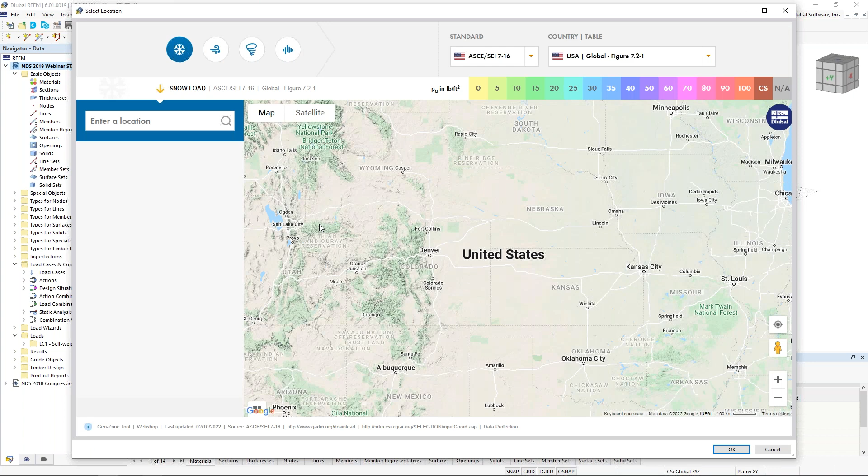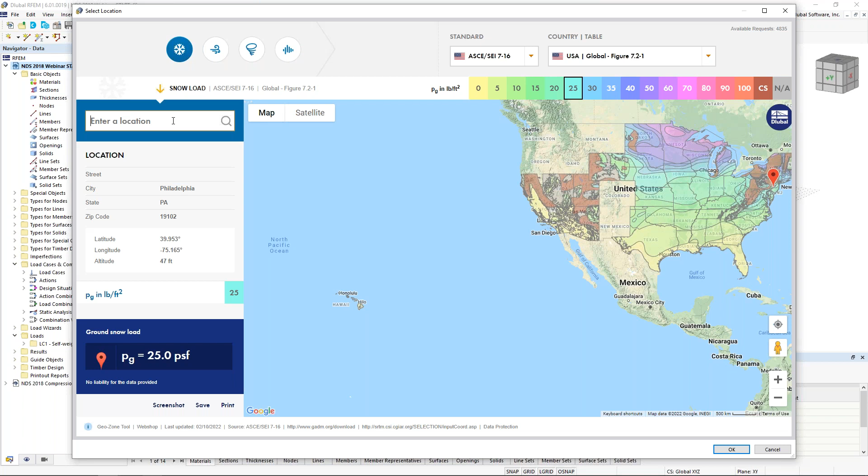Finally, under the model parameters, you can see that this links directly to our online Geo-Zone Tool. And this Geo-Zone Tool is available on our website where we have integrated the maps from the ASCE 7 for snow, wind, tornado, and seismic. This is linked with Google Maps technology, so we just need to type in our project location, for example, Philadelphia, and we can see the ground snow load is automatically populated here directly from the standard. When I click OK, all of this information is automatically going to be imported into the model that will be used for those load wizards a little bit later on.

So once we are done defining the base data, we will be brought into the main program, and we can see our drawing grid activated here. Well, we can modify those drawing grid settings by right-clicking at grid down at the bottom. My default spacing here is set at 1 foot. If we see anything other than this, for example, when you first start the model, you might see something like around 3 feet. You can always hit this default option here to go back to the 1 foot or adjust this to maybe 0.5 feet. We can also open up our units here and change this to inches if we're working on a much smaller scale.

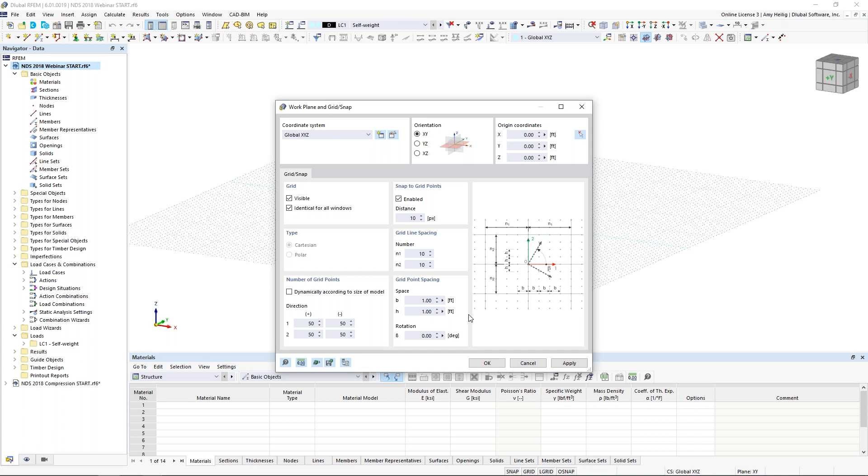So there are many different ways to model within the program. We could begin by drawing our first member and defining the cross sections and materials as we go. But an alternative option I'm going to take is to define all of my cross sections and materials at the beginning. So over in the navigator, I can right click on my sections and I can create a new section here.

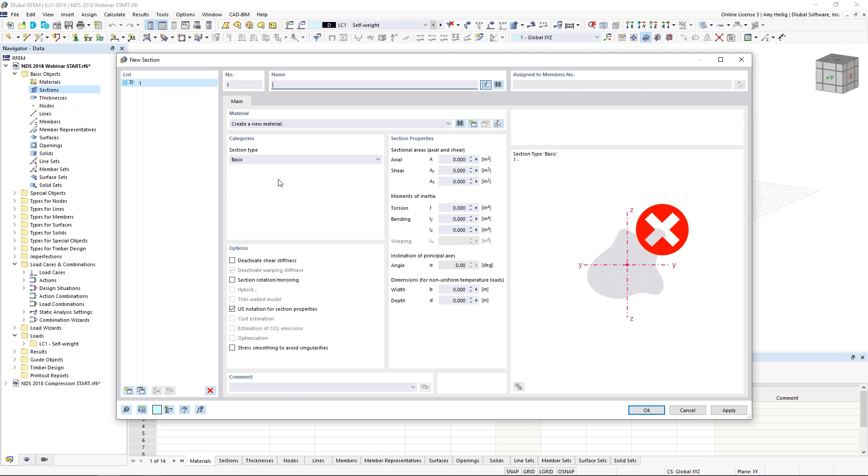I want to access my section library, and we have our standardized sections over on the left, which does include timber. So when we launch this, we can use our filters over on the left to filter the NDS 2018, and we see the various dimensional sections available to us, including glulam, for example, and we can see all of the available sizes.

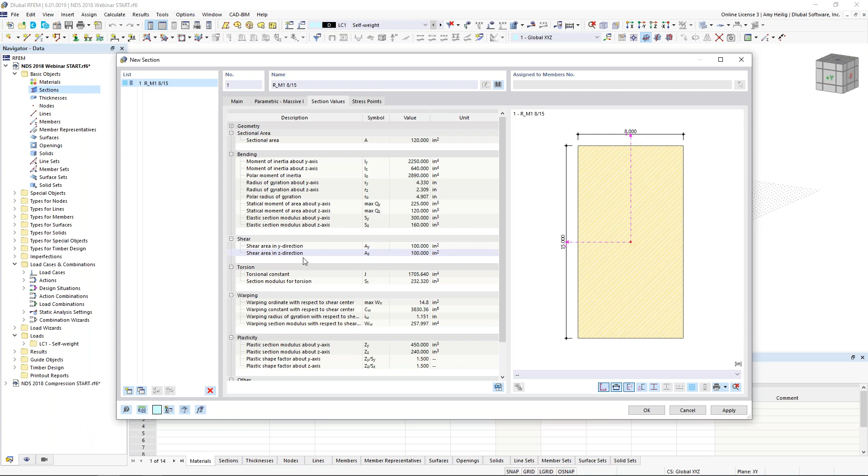Now, the alternative option is to go back into the library here and choose one of our parametric massive sections. So for example, we can just choose a rectangle. This allows me to input the dimensions directly, and we'll choose 8 inches in width and 15 inches in depth. The cross-section properties will be automatically calculated here. And back under that first tab is where we need to set our material for this cross-section.

So we'll visit our material database now, and we can use our filters over on the left here to filter to timber. We can filter to the NDS 2018, and sure enough, we have every single material available here from the NDS standard. Now we can take it a step further, and perhaps we want to filter to table 5A for our glulam materials. And I'm going to select 24F-1.7E. Over on the right-hand side, we can see the different options, and we'll choose Southern Pine.

I click OK, and now that material is available to me for all future sections that I will model in the program. I can simply make a copy of this existing cross-section, and rather than going into my library, I can simply type in the exact dimension here, 26. So we'll notice that this cross-section updates accordingly. Same material will be used. We want to create one more cross-section here.

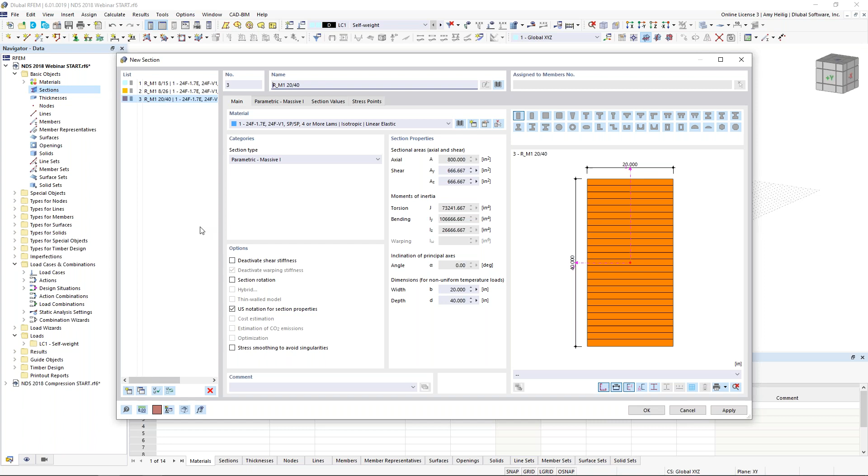This time, instead of a rectangle, we'll choose a parametric square section. Under the massive tab here, I will go ahead and adjust the dimensions to 6 inches. Under the main tab, I don't want to set glulam, but rather I'm going to go back into my material library and choose table 4D.

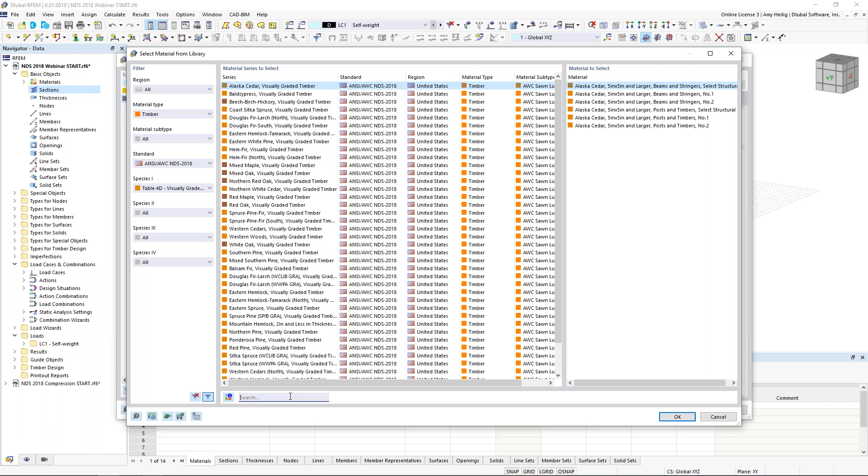Now we can see all of the available materials to us, which is still a little overwhelming, so we can take advantage of the search options down at the bottom. So for example, if I begin to type Douglas, notice that all of the materials with Douglas within the name are now filtered. So I can choose Douglas Fir-Larch (North), and then I can scroll over to select number 2. I click OK, so now we have that solid section given to us here.

Once I click OK, what I'll notice is that my materials and cross sections are now available within my navigator here. So I want to begin by drawing my first member. I will adjust my drawing grid into the vertical XZ plane, and I will go up to my tool to draw a new single member. The member type is going to be beam.

The design properties are activated here, and this is specific to the timber design add-on and relative to these additional tabs up at the top. So we'll leave this enabled, but I'm not going to get into the details right now specific for the design properties. We'll go to the section tab here, and the distribution type is going to be set to linear. So this allows me to define a tapered glulam section.

Now, new within RFEM 6 is that previously we only allowed you to define a tapered section that looked exactly like this, where the center line just runs right down the center. But we have added within RFEM 6 the ability to adjust the alignment. So now we can see that the taper only occurs at the bottom section of the member.

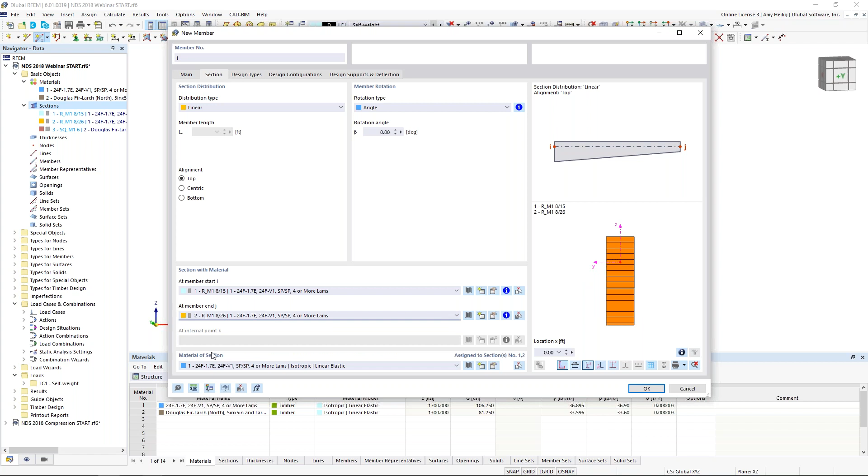So the member start will be that 8 by 15 section, but the member end will be the 8 by 26 that we've already defined. The material is automatically set here. So this is all that we need to do to define our first member. We click OK, and I can snap from the point 0, 0, 0 up to a point 15 feet in the vertical direction, and we have our first tapered member.

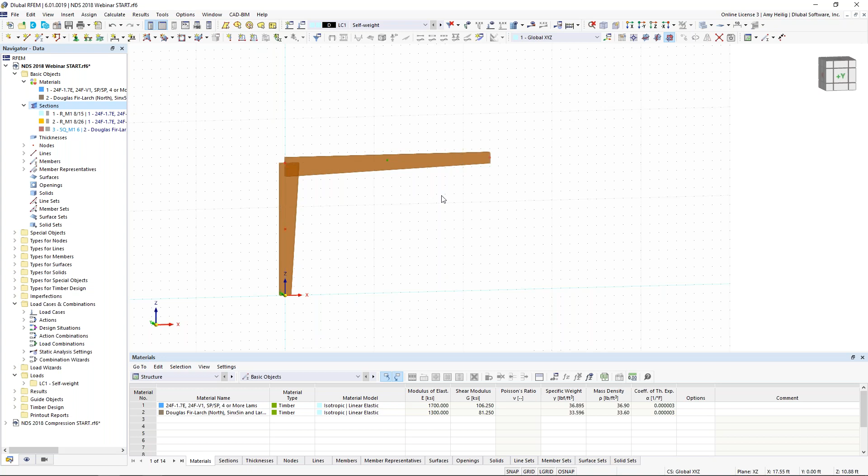Now, in a similar fashion, I can snap to a point here 23 feet in the X direction up to the top of the column. If I right click to exit out of that dialog box, I see here that I would like to add in some type of pitch for my roof, and I'd like this pitch to be 14 degrees. So rather than manually having to figure out the geometry, we can select this member, and under the edit options, I can go down to chamfer.

And I can input in an angle of -14 degrees. I would like to rotate about the global y-axis in the vertical z direction. And then I need to graphically select my base point here. I click OK, and so now we'll have that 14-degree incline.

I select both of these members, and I'm going to utilize my mirror tool. This is exactly like what we would see in something like AutoCAD, where I can create a copy. I would like to mirror about the ZY plane, and I'm going to choose my mirroring point right here at the apex. I click OK, and we should see our first frame generated.

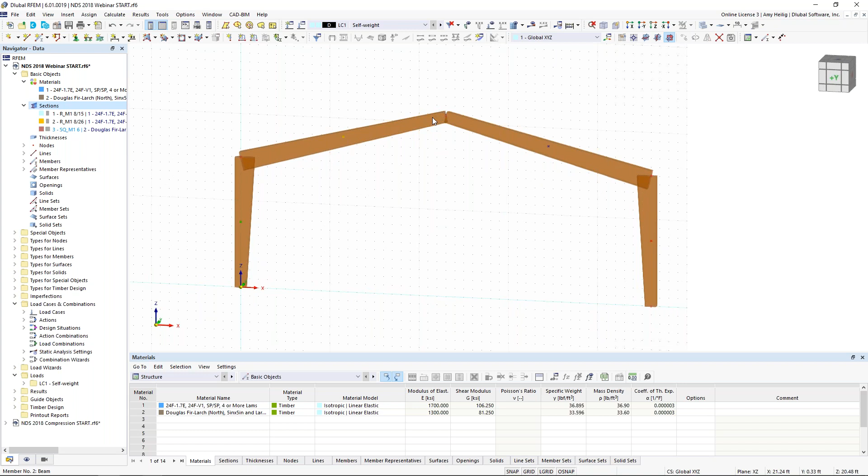Now, I want to add a member hinge at the top here only for my beam on the left. Well, I can do so by double clicking on the member. Now, by default, everything is considered fully fixed. So in order to add in that member hinge, I can activate the hinges here. And now we get a new tab. And at the member start, I can define my member hinge. And you can see that the program automatically suggests I probably want to release the moment about the local Y and local Z axes. That's correct.

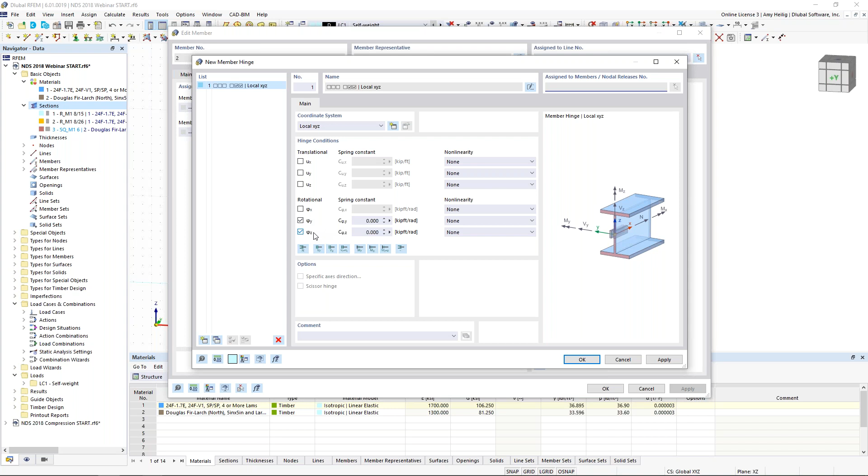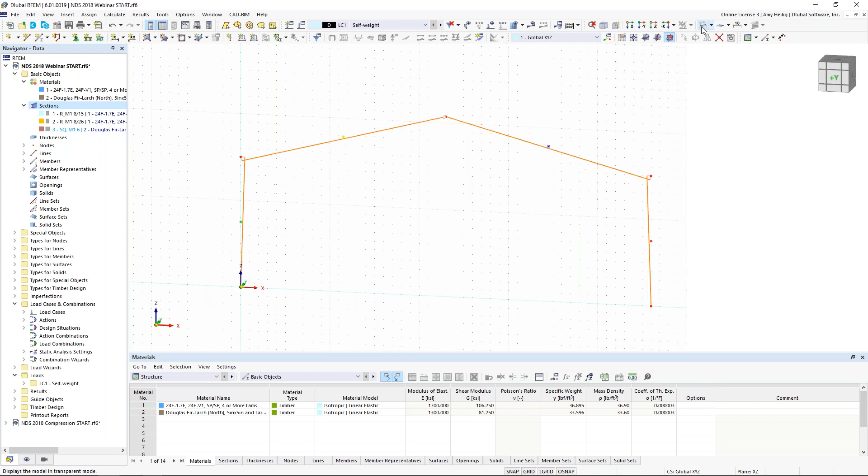I click OK. So now that member hinge definition is available to me for any future members within this model. I don't need to keep redefining. I can simply select it from this drop-down box. I can click OK. And now we should see that member hinge applied to that beam on the left. So I'll turn this into wireframe view, and I'm going to turn off my member representatives in order to make this a little bit more clear for you.

I'm going to hold down my control key to select both of these top members. And I'm going to right click, and under members, I am going to divide the member by a set number of intermediate nodes. So I want to add 2 nodes along the member length here, but it's really important that I also check this option down at the bottom to create the on member nodes without actually dividing the member. We want to keep these as one continuous segment and just rather have these nodes added along the length.

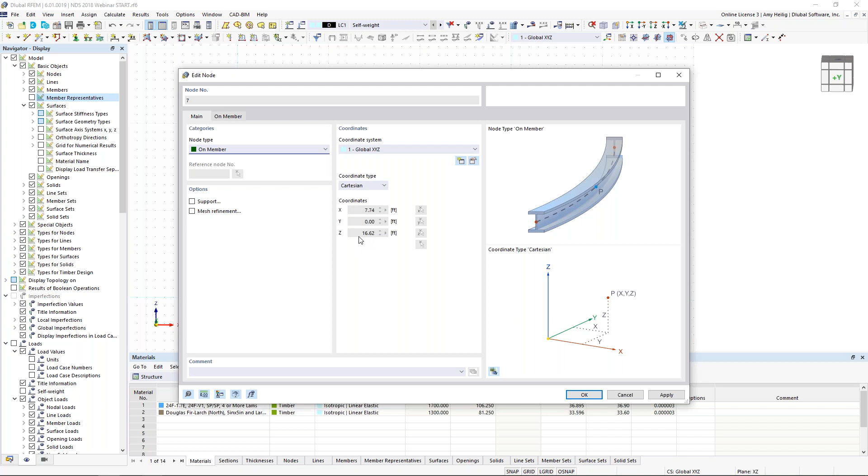So when I click OK, you'll notice that these nodes are added. They're a different color than my standard nodes. If I double click on it, the reason why is because it has this special setting here. The node type is set to on member rather than standard. So now any other member that frames into this original member, maybe we add in some nodes at these, or add in some loads at these specific nodal points, will all be detected along the member length.

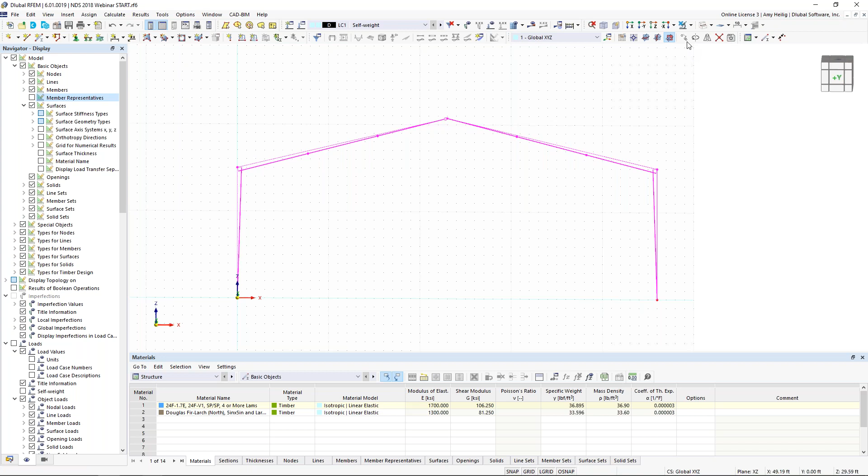I'm going to take my selection box and drag from right to left. And notice I am not going to select the nodes at the bottom of the structure, and there is a reason for this. We will select all of these objects except for those nodes and utilize our Move Copy tool. Move Copy tool allows me to create a copy, and I'll create 4 copies in the Y direction of 16 feet. But under my second tab, I have this option to activate these step links.

So when I activate this, I get a new tab, and the program allows me to create new members between my copied nodes. So I can create a new template, and this should look like a familiar dialog box. It's as though we're drawing a new member. The member type is going to be set to truss.

So truss is a little different, and you'll notice that the hinges is now grayed out. That's because internally we're going to assume that we have a moment release at the member start and the member end. So rather than having to manually define that, we can select truss, and that's automatically applied.

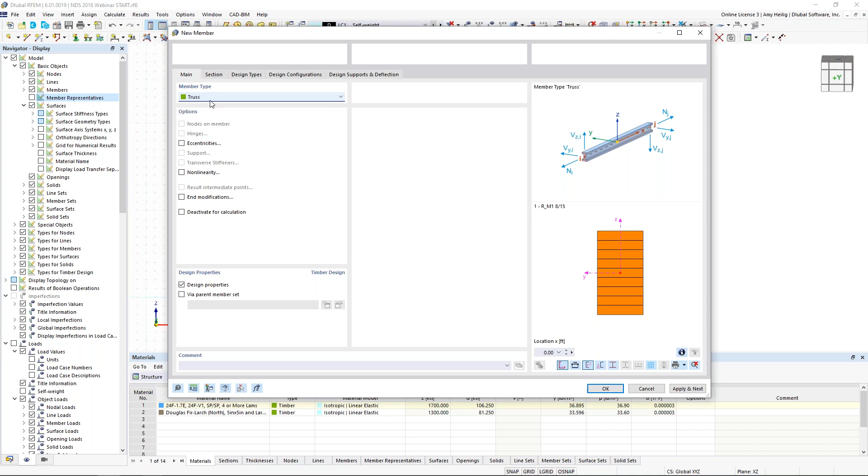Now for my cross section, I want to use my drop-down box here to select that 6x6 solid Douglas fir-larch section. I click OK. Remember, I'm still within the Move Copy dialog box. I click OK. And again, the advantage is that the program has automatically generated those members between those copied nodes.

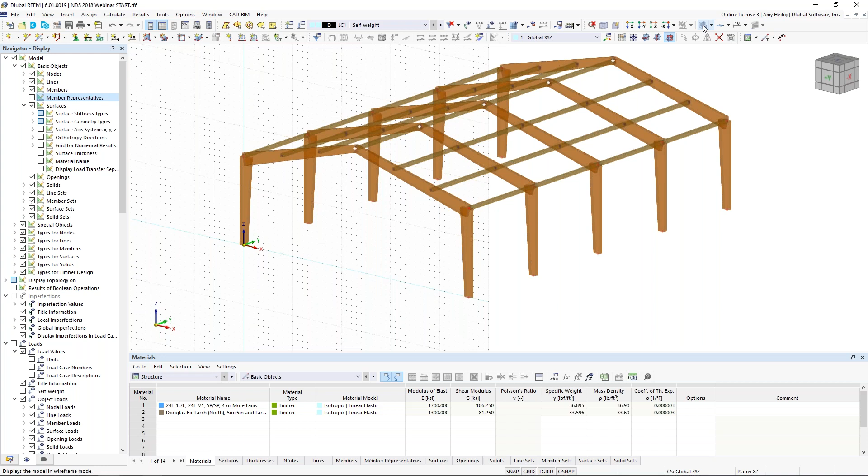Okay, so what we would like to do now is to add some columns at the front and rear of our structure. What I'll do is turn this back to wireframe view, and I'm going to adjust my drawing grid origin with this button up here in my toolbar. And I want to snap that directly to this point along my member length. So we can see when we rotate this around, the drawing grid's still at the front of the structure, but I've just modified the location.

We're going to draw a new member. The member type is beam. I do want to activate the hinges here. At the section tab, I will leave this as the 8x15 section, but not tapered, just one continuous section throughout the length. For the hinges, I would like the member hinge to be applied to the member end. Remember, I've already defined that member hinge. I can select it from my drop-down box.

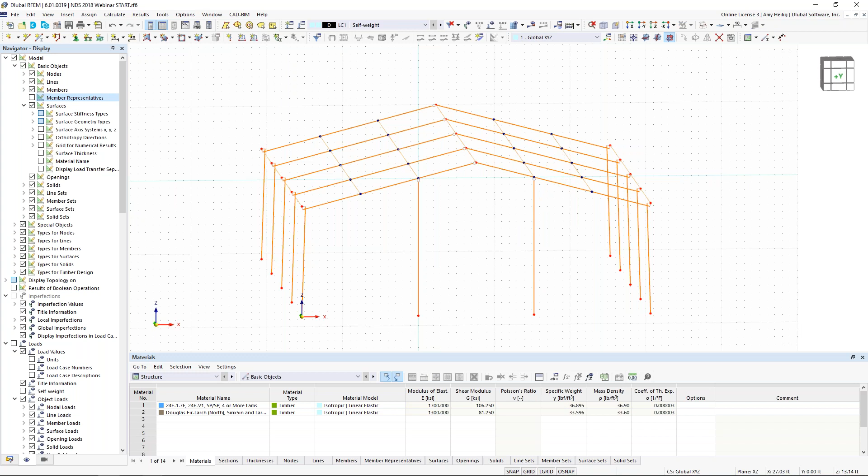I click OK, and I'm just going to snap here from a point at the bottom of my structure up to the top, the intersecting node. Now, this node needs to be slightly adjusted at the bottom. Rather than sitting at negative 0.33, I want it to sit at 0 elevation. I just adjust that, I hit enter, and now that column is exactly where it should be. I can highlight this element, hold down my control key, and utilize the drag and drop feature to make a copy here on the right side of the structure.

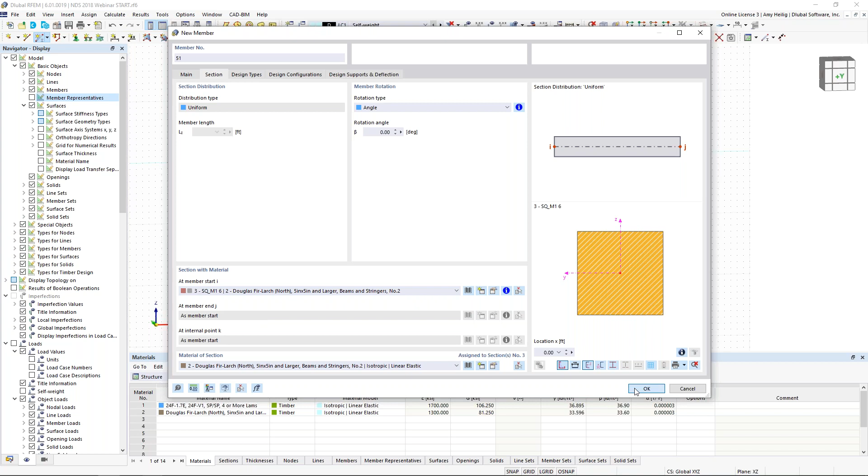I would like to add in some additional lateral bracing here in the global X direction. So we go to draw a new member. Once again, the member type will be set to truss. The section is going to be that 6x6 solid section here. Remember, I don't need to apply any hinges because internally the truss option is taking care of that. And I'm just going to snap from the bottom of my column elements up here to the top. I can rotate this around. Notice the program automatically snaps to these nodal points.

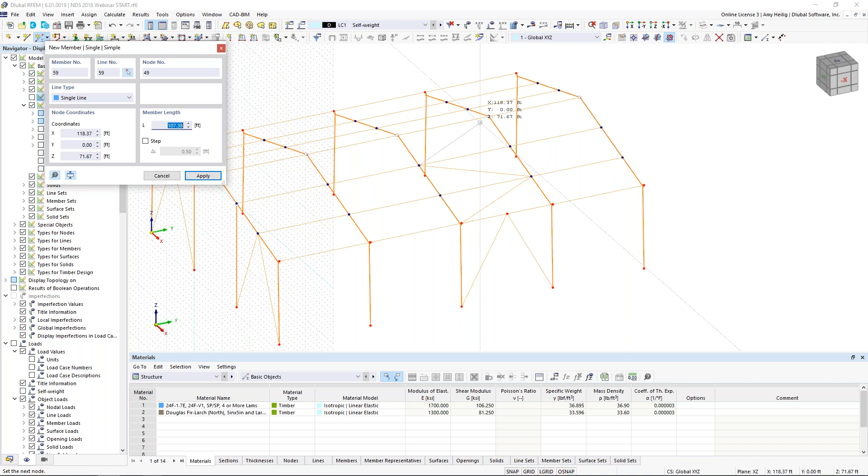While I'm still within this dialog box, I want to add in additional lateral bracing here in the global Y direction. So I will snap from the bottom of the column. Notice the program detects the midpoint here of that truss segment. And I'll do so up here on the roof by just selecting my start and end node points. And we'll do it one more time here. I right-click to exit out of this dialog box, zoom in just to make sure everything's connected, everything looks fine.

Now I'm going to hold down my control key to select these additional brace elements that I just created. We'll utilize our mirror tool once again to create a copy about the YZ plane, and I'm going to select my mirroring point at the top here of my structure. I click OK, and now we have the bracing on the other side.

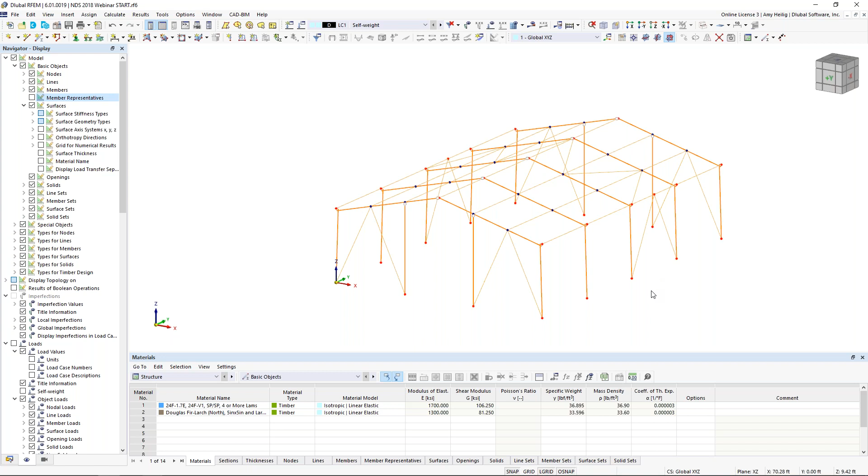I would like to take these elements at the front of the structure. I will use my selection box to highlight them all. I hold down my control key, I drag and drop to make a copy at the rear of the structure. So now those column elements and braces are shown at the rear of the structure with that simple tool. Okay, the member modeling is now complete.

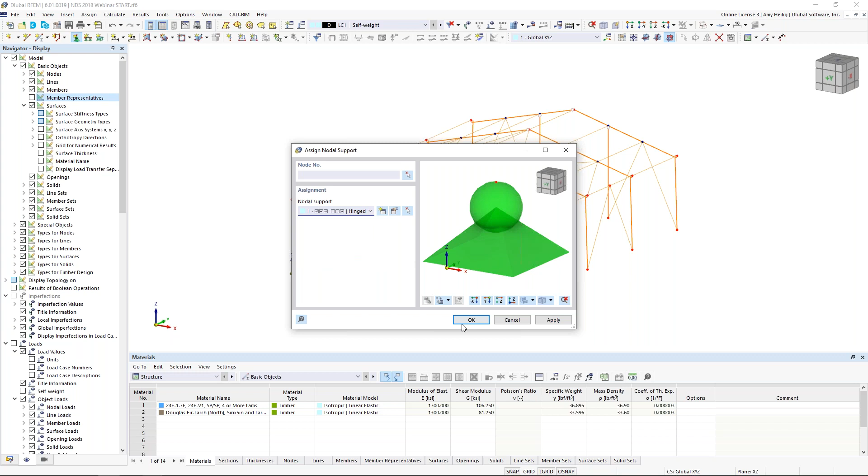What I would like to do is to support the structure with a new nodal support, and we can find that up here in our toolbar, assign new nodal support. Now we have some default options here within the dropdown, including a typical hinged, we have fixed, or we have a few roller options. Of course, you can always create your own nodal support option with the 6 degrees of freedom. Non-linearities are available in there as well, but for today, we're just going to choose the default hinged. I click OK, and this will allow me to highlight over all the nodes at the bottom of my structure.

If I right-click to exit that dialog box and right-click on any one of these nodal supports, I can use my slider option to increase or decrease the size. That's also new within RFEM 6.

So our member modeling is complete. We've added the supports. I'd like to move on to loading now, but there's one thing related to modeling I want to take care of that affects our loading.

This structure will obviously have some type of roof membrane, but I don't want to actually draw in the roof surface with a material and thickness. Instead, I'll take advantage of a new feature within the program for load transfer only. I'm going to draw a new surface, and it's not going to affect the stiffness or add any rigidity to the structure. We're not applying a material, we're purely using it for load transfer to our members.

Within our toolbar, we can draw a new surface, and I'll choose the option polygon. Rather than the stiffness type set to standard, where I would define a material and thickness, we'll use the dropdown to select this new option, load transfer. Everything is grayed out here since we're not adding stiffness, but instead we go to this second tab and tell the program in which direction we want to transfer the load.

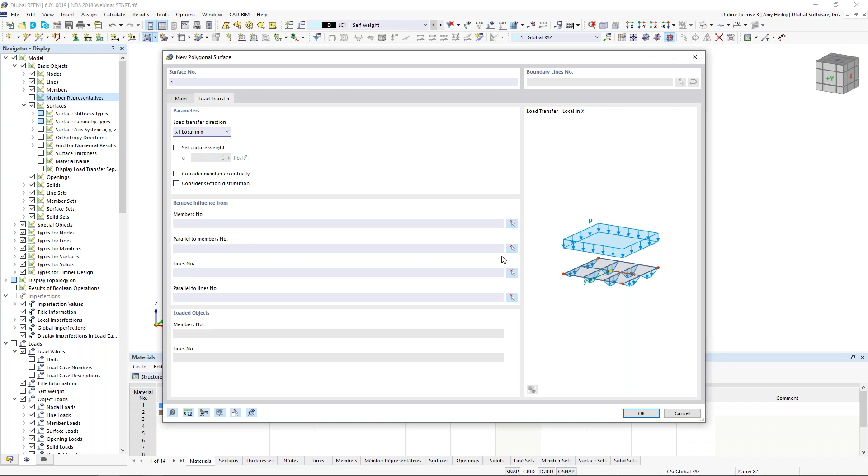When I click OK, this allows me to snap to my different points to draw in this load transfer surface on the left side, and we can see that dotted line shown in wireframe view. We'll do so on the right-hand side, and close this loop by selecting our original point, and here are those two surfaces generated.

I can right-click to show the local axis system of those surfaces, and make sure the local x-axis direction for the load distribution is in the correct orientation. I'll turn back off the local axes. We can even turn this into rendered view if we'd like to see those surfaces in a bit more detail.

Now that these surfaces are drawn, our modeling is complete and we can truly move on to the loading. In order to apply the loading to the structure, we need to set up our load cases. I will go up to my toolbar to select Edit Active Load Case.

The program by default creates my first load case, called self-weight. I can go ahead and rename this to dead load. Notice the self-weight is active here. The action category is based on the ASCE 7, and we've selected dead load from this dropdown.

I'm going to create a second load case, called snow load with the action category of snow. Self-weight is unchecked here, since we don't want to account for it twice.

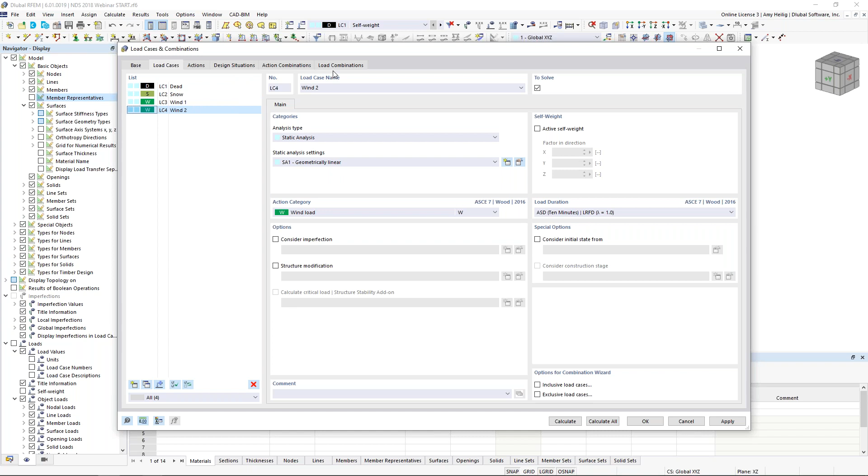I'm going to create a third load case, which will be wind 1 with the action category of wind load. And I can even make a copy of this existing wind load case and simply rename it to wind load 2. Now I'll get back into this dialog box to explain further about design situations and load combinations, but for now I just wanted to set up these load cases.

Now that those are set up, I can actually apply the loads to the structure in the relevant load case. We'll begin with dead load. The entire advantage of these new surface load transfer options is that I can now apply a surface load to this structure, which is much more efficient than applying individual member loads to each one of my frames, for example. So I'll go up here to draw a new surface load.

The load magnitude is going to be set at negative 0.01 kips per square foot. I can graphically select surface number 1 and surface number 2. I click OK, and here are my loads shown graphically on the structure.

Now, under the display settings in my navigator, we'll see at the very top our surfaces tree. When I expand the surfaces, we have this setting to display the load transfer separately.

So I can activate this, and now we can see the loads applied to each member based on the tributary area. So this is a bit of a time saver, utilizing these surface loads.

Now for our snow load, we want to take advantage of our load wizard. If you remember, we set that up within the base data at the beginning of the presentation. Going back to my navigator, under the data tab, I'll scroll down and see my load wizards tree, and we have available the snow loads. I'll double click on this, and this will allow me to automatically generate the snow loads according to the ASCE 7.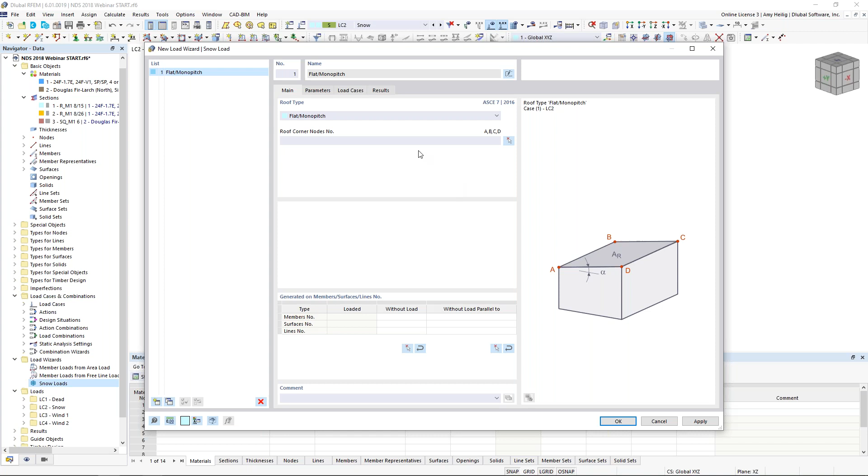So we want to choose the roof type for a dual pitch type of structure. I just want to let you know that this load generator is only applicable for rectangular type structures. If you have anything outside of this geometry, you won't be able to use this automatic load wizard, so just keep that in mind.

For today, we do fit into this geometry, so we want to graphically select the nodes that make up the roof. We will select the 6 exterior nodes, clicking one by one. Once I finish that, the program automatically detects what the roof geometry is.

Under the parameters tab, the program has already input my ground snow load. We have connected that to the GeoZone tool directly from our website, which inputs the 25 PSF ground snow load directly from the ASCE 7 maps. Now, of course, you can manually enter this information as well.

Now, the snow load parameters, maybe you'd want to adjust these, such as the terrain category, roof exposure, risk category. We can use our drop-down box for any one of these options.

Under the load cases, we have the ability to create both the balanced and unbalanced load cases. I'm not going to create the unbalanced for today, so I'll just uncheck them, but we will create the simple load case for balance. The program recognizes, okay, we probably want to use load case 2 here that was already set to the snow load designation, so it's populated that.

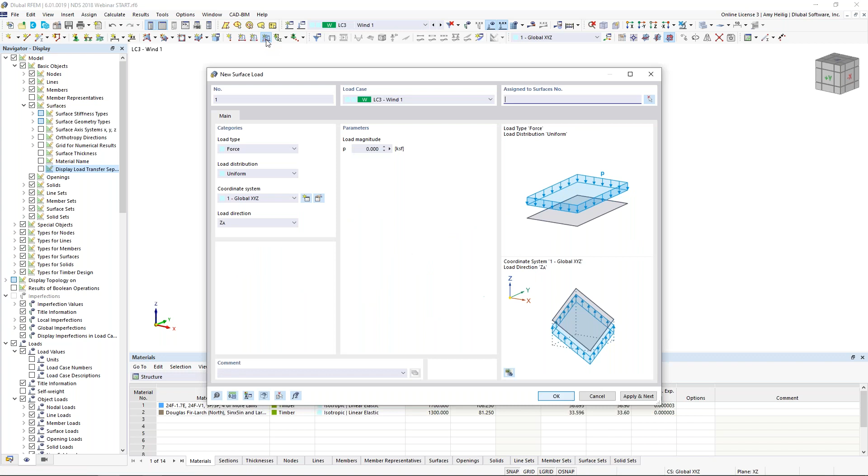For load case 3, we will begin with a new surface load. The difference here is that I want to change this based on the local X, Y, and Z coordinates of the surface itself, so we'll leave this according to the local Z direction. I want to modify the magnitude to 0.025 kips per square foot. I select graphically surface number 1, click OK, and then hit apply and next. This allows me to remain within this dialog box, but we can see the upward wind load applied in the background here to surface number 1.

Now I can simply adjust the magnitude to 0.015 kips per square foot. I can graphically select surface number 2. I hit apply and next, and now we see that additional surface load applied on the second surface.

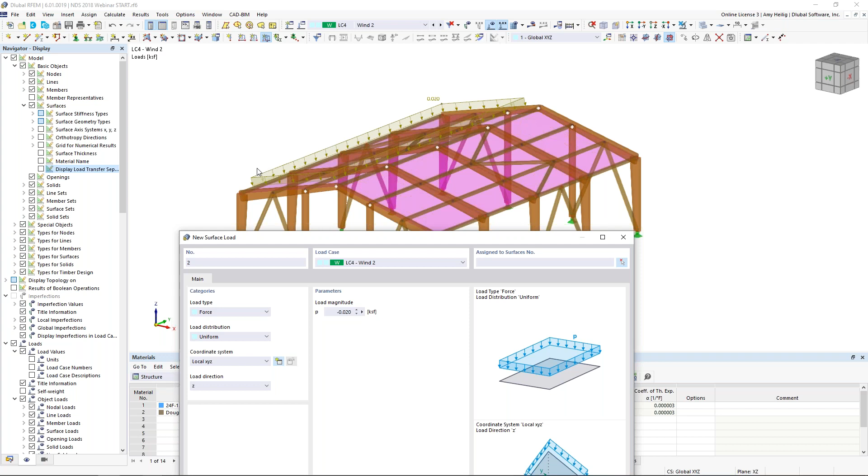Now I can simply switch to load case number 4, while still within this dialog box, and adjust my magnitude to negative 0.02 kips per square foot. I can type in surface number 1 - I don't necessarily have to graphically select it. I hit apply and next, and we see that downward pressure applied to surface number 1 under load case 4.

I'm going to adjust my magnitude for the last time here to negative 0.01 kips per square foot.

I apply to surface number 2, and I click OK. Now all of our loads have been applied to the structure. Let's go back into the load cases and combinations dialog box here.

Back under the base tab, remember we have activated the load combinations to automatically be generated according to ASCE 7. The program requires us to choose the wood option because we've activated the timber design add-on, and the entire reason for this is the feature of creep. Let's jump back to the PowerPoint to discuss this in a bit more detail.

This entire topic is new within RFEM 6, and we want to refer to NDS 2018 section 3.5.2 for long-term loading. This section talks about the time-dependent deformation, or creep factor K sub CR. This factor should be applied to the long-term deflection, but not the short-term, in order to be considered for the total deflection according to equation 3.5-1, which we can see written here.

So when we automatically generate these load combinations according to ASCE 7, wood in particular, we are going to create a third design situation. Design situations will make more sense in a minute, but I want it clear that we are actually referencing IBC 2018, section 1604.3, in order to generate

This is a new feature; previously we were not able to consider this creep factor. You'll notice within the drop-down box, if we do not want to consider creep at all, we can just set this to 1.0. Otherwise we would choose the 1.5 or 2 factors here, which come directly from the NDS standard.

I always like to activate this option here, combination names according to the action category. And we will jump to the design situations.

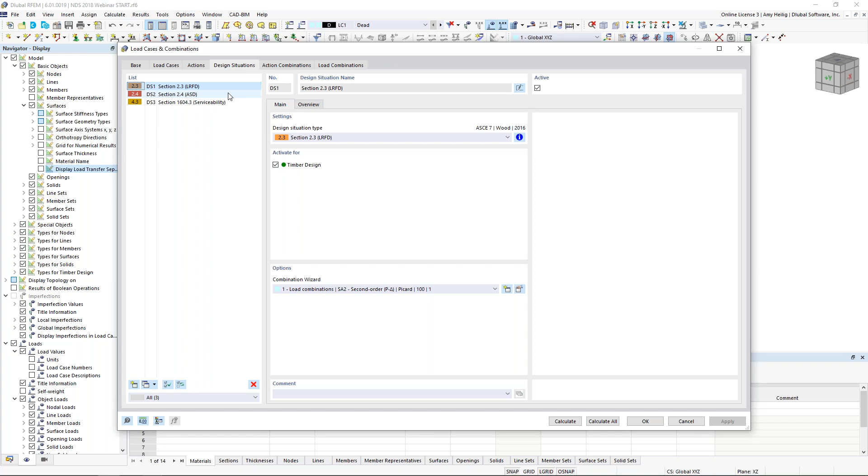So we have 3 design situations generated: 2 directly from ASCE 7, LRFD which is our factored load combinations, and ASD which is our unfactored load combinations. Again, this is new within ASCE 7 wood, we create this 3rd design situation here

for serviceability. If we click this info button, we can see directly the load cases that will be considered for the generation of the load combinations. And here is that creep factor times our dead load.

All of these are active for our timber design add-on. Now for today, I am going to be doing my design according to LRFD, not ASD. Therefore I don't need the ASD load combination, so I can simply deactivate that here.

It will just decrease the number of load combinations, which we can see here under our last tab. Here are my factored LRFD load combinations for my first design situation, and my 3rd design situation are my IBC load combinations. Here we see the 1.5, and we can toggle to the assignment, the 1.5 creep factor multiplied by our dead load.

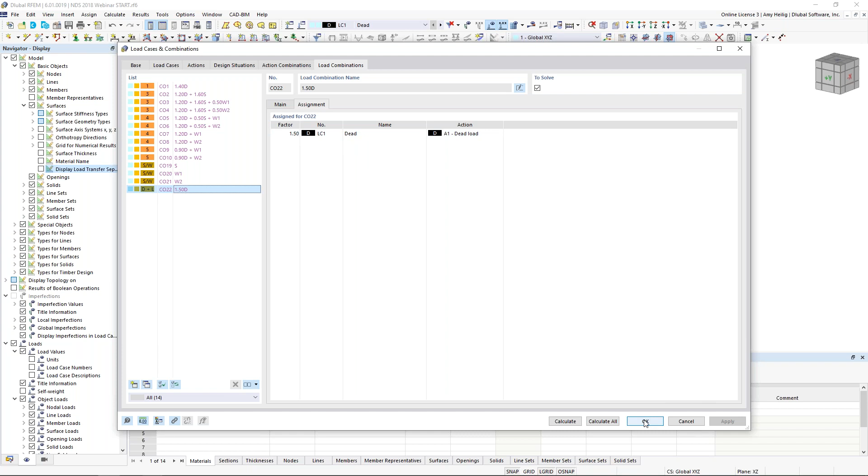Now that these load combinations are set up, within our drop-down box we can see all of the available load combinations we were just looking at. We can view all of the loads applied to the structure, including the relevant load factors according to ASCE 7 and the IBC. So technically we are ready to run the analysis portion.

The huge advantage of running RFEM 6 is that these add-ons have all been integrated here within the main program, so we want to do the analysis and design workflow together. What I'm going to do is move into the design properties for all of these members.

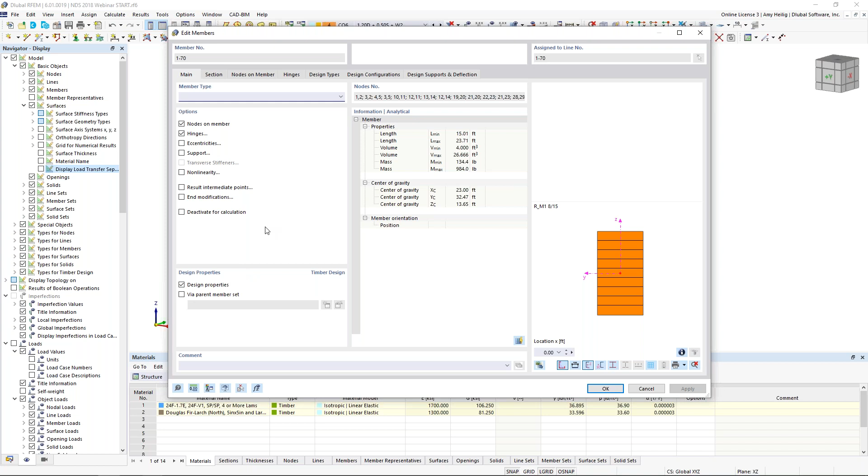If I highlight all of my members and take a look at the edit member detail settings within my dialog box, you can see I have members 1 through 70 selected. We have our design properties turned on here, which activates these various settings for design types, design configurations, and so on.

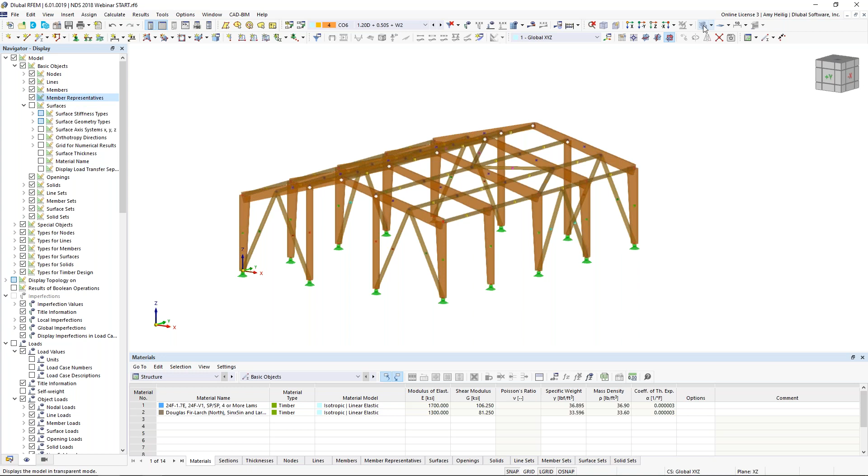Let me turn on the member representatives and wireframe view. So you'll notice we have a lot of color coding going on here. Again, we have activated that within the base data, so the program has grouped together similar members with cross sections, materials, and so on. Now, I want to take these 4 members at the end, and I'm holding down my control key to select them.

I am going to double click to edit, and I'm going to add a comment down here, such as end frame. Remember, I also activated the option at the beginning of the presentation so that member representatives will detect different comments. So now these 4 members are in a different member representative group than the interior members. Back under my navigator display, I can also see the color coding, and we can scroll through the different member design or member representative options here.

Okay, so what is the advantage of these? Well, when I double click any one of these colored dots, so for example, we'll start off with member representative number 4, it will bring me into the member representative dialog box, and you'll notice we have these exact same tabs that we saw for each individual member. So what I can do now is to input the design information for a group of members that I know are all going to have the same unbraced lengths, for example, the same service conditions, whatever it may be. That way I can go into the member representatives, make a change, and it will affect all of those group members rather than individually applying to each member.

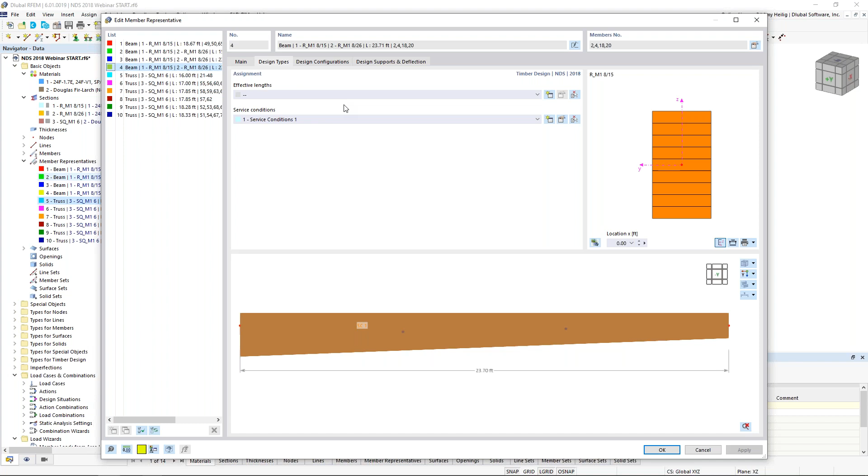So let us begin here with these initial tapered members. Remember, this includes the 4 exterior girders here. Now we want to start off with the effective length. So I'll create a new effective length here. And this is my input information for stability design. So we're talking about flexural buckling about the strong axis, the weak axis, and lateral torsional buckling. Now we want to set the information here on the second tab.

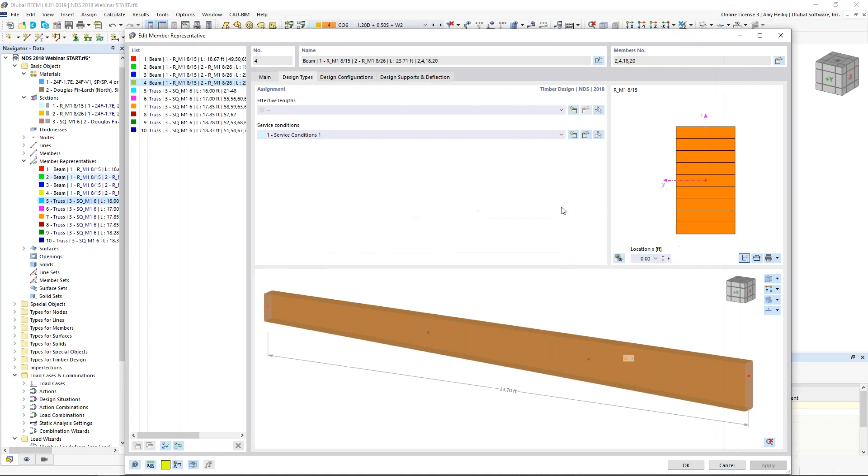But before I do, when I initially create a new effective length, notice over on the right-hand side, my members aren't populated. Well, if I initially create this definition, I click OK, and I go back in to edit the same effective lengths, notice now the program says, okay, we're going to assign this to members 2, 4, 18, and 20. Why do I want to do that? Because now my picture in the lower right-hand corner will populate here. So I can see exactly which members I'm looking at in order to apply my intermediate restraints. So let me turn this to wireframe view.

Now, this all has to do with K-factors, with unbraced lengths, incredibly important for design, and we have two options here. Number one is we could work with the table down here at the bottom. Perhaps we want to toggle this to absolute values, and I could just directly input K times L for my strong axis buckling, weak axis buckling, lateral torsional buckling. Now, alternatively, I can take advantage of inputting these intermediate supports graphically so that the program can calculate the K times L or the effective lengths automatically for me.

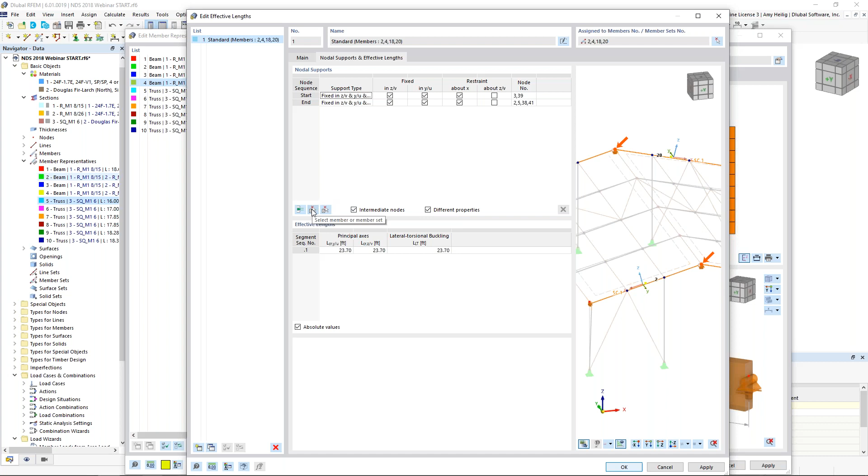What I want to do is to have the program detect the intermediate nodes along the member length. So I'm going to activate this option here, intermediate nodes, and then I'm going to use this option to select the member. I can select any one of these 4 members here. I'll just choose any one of them. And now notice the program has detected these 4 nodes along the member length. So we'll begin right here at the apex. Well, notice we only have a truss member framing in the weak axis direction. So I probably want to add this intermediate restraint here to only restrain my tapered element in the weak axis or local Y direction.

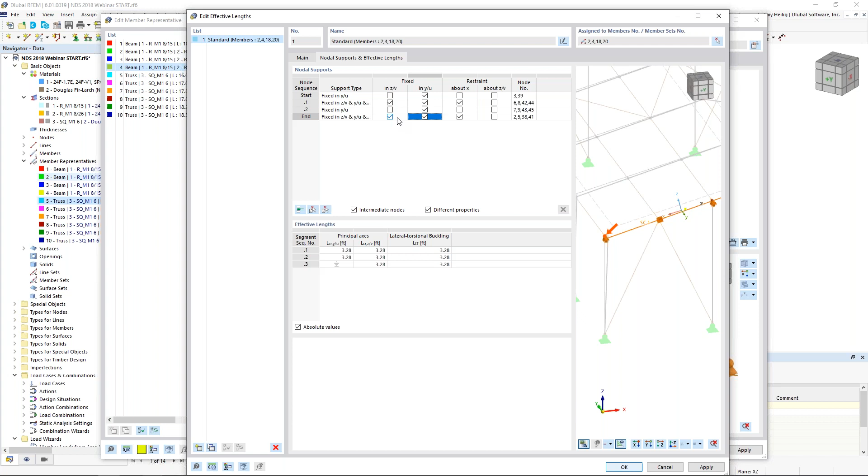For node number 2, we have a column framing up. So I'm going to assume that this element is restrained in the vertical Z direction, as well as in the weak axis direction from my truss, as well as rotation against torsion at this location. For my third node here, I'm going to assume these braces really have not much impact, so I'm only going to restrain the member in the weak axis direction. And finally, for my fourth node, we're going to leave this as default in the local Z, local Y, and about the local X axes. So now these 3 segments are updated here to consider my true unbraced length.

So this is how we can automatically consider that within the program by setting these intermediate restraints. So when I click OK, we can see here in wireframe view, these intermediate restraints applied internally within the member. They're not true supports like nodal supports that we initially applied at the bottoms of our columns. They're just purely used for the design.

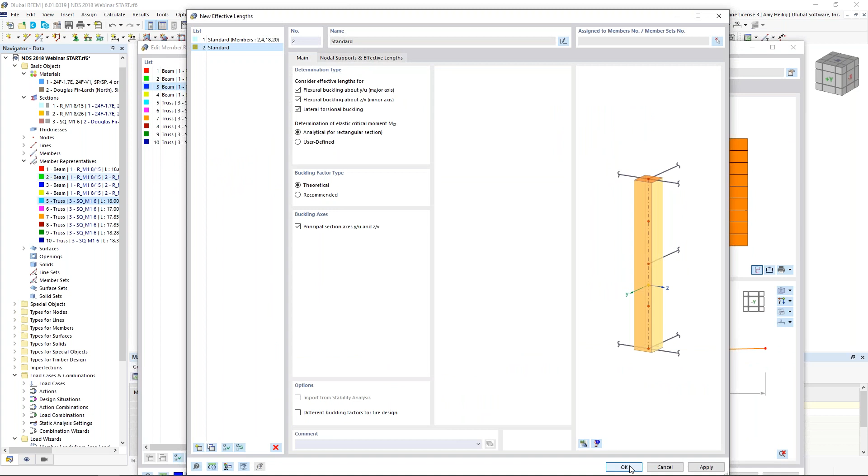Now, we want to jump to our member representatives here, which include my 6 interior frame elements. We have a little bit of a different scenario here. So I'm going to create a new effective length. And once again, I'm going to define this effective length. I'm going to click OK and go right back in there to edit it. The reason why is because now under the second tab, I can toggle to my picture and I see my 6 members updated here within my graphical view.

I want to detect those intermediate nodes. I will graphically select any one of those 6 elements. I see my 4 nodes detected here. Up at the apex, I want to restrain it in the weak axis direction only. At my second node, it is also the weak axis direction only. My third node, weak axis direction only. We have no columns framing up at the center beams here. But finally, at my fourth node, we do have a column.

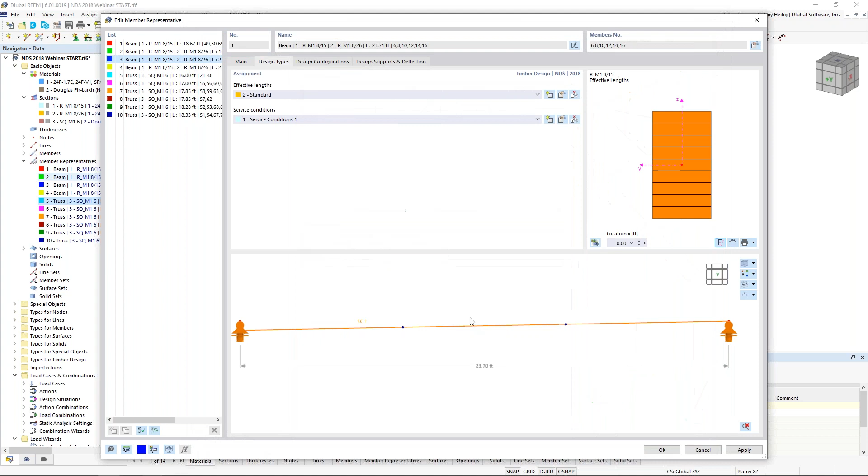I'm going to assume that the program is going to restrain this in the vertical Z direction, the local Y direction, and about torsion. So we can toggle to our absolute values to see everything updated accordingly. Okay, so now that we have defined these for those 6 interior members, we can see the program update here automatically to show what's going to be used for design.

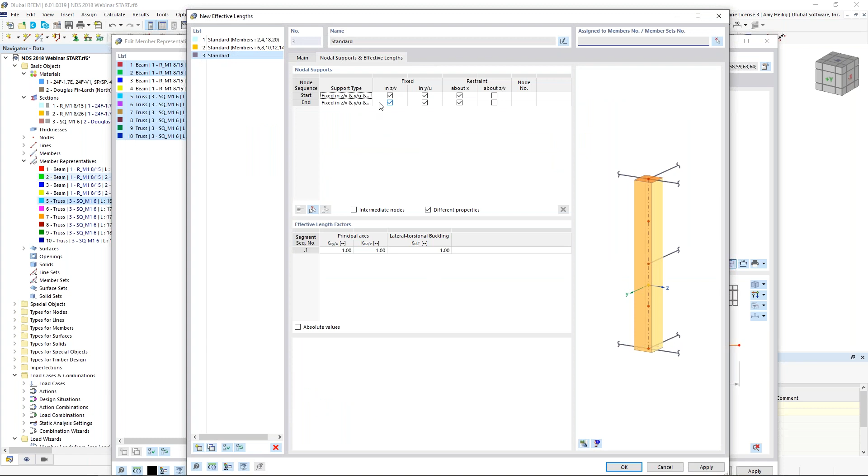So let us talk about the remainder of all of these member representatives. I'm holding down my control key to select all of them. It is all the remaining braces, the columns, and for this, we need to define a third effective length, and this one is much easier. All that we need to do here is leave this as default. These members are supported at the member start and the member end according to these default options here. No intermediate nodes detected. I click OK. We can see the program update graphically here within our view.

Now, for the rest of these settings, the service conditions, if we go into the detail settings for these, are the members wet? Are they dry? What is the temperature? Is it pressure treated? We know that this is all going to affect the adjustment factors for the NDS design.

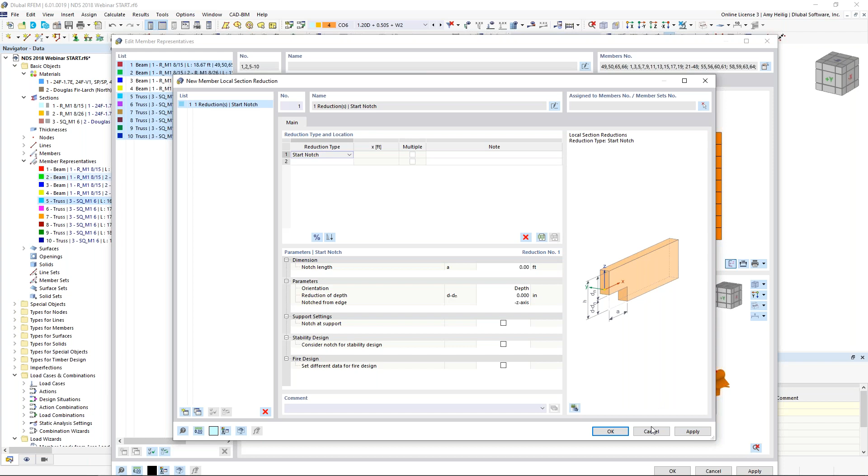The local section reductions, we can create notches in our members. So perhaps we have a notch at the member start or the member end, or internally, we can define that here with these section reductions. Now, this is only available for standard members. You wouldn't see this option for our tapered members if we went back to one of these other member representatives.

The design configuration. So we have here strength, design, serviceability, and fire. So let us begin with the strength configuration. We'll go into the settings here. So just some various settings that will go into the strength design according specifically to the NDS. So for example, torsion. If we're not really wanting to design these members for torsion, the NDS is a little bit vague on torsion design. And I really just want to skip this.

Well, what I can do is to set a higher ratio here, such as 0.3. So as long as my stresses for torsion are below a 0.3 ratio of the limiting torsion capacity, then we'll completely skip this check. So that's a little trick you can do here within these settings. Now we have some additional settings, including topics like the size factors, the flat use factors, and so on.

Under the Stability tab, this is a new feature within RFEM 6 specific to the NDS. It is the representative dimension for tapered compression members. I'll go back to the PowerPoint to explain this in more detail. So again, a new feature here that we've added within RFEM 6. We're going to reference the NDS 2018 section

3.7.2 for tapered columns. So previously in RFEM 5, what we were doing is for any check along a tapered glulam member, we were just using the depth at that relevant X location. Well, the code doesn't exactly say that. It says to please calculate the representative dimension for the tapered column instead. And we can see equations 3.7-2 and 3.7-3 are given to us here directly from the NDS.

And this all depends on the support conditions, but this is to calculate that representative dimension. So we'll use the variables here, the depth for max for the tapered section, the minimum depth here for the tapered section in order to calculate this. Now, again, this all depends on your support conditions. You'll want to refer to the NDS to review these equations in a bit more detail.

But the equation preference can be set under the timber strength configuration and under that stability tab, which is exactly what we're looking at here. So I go back to the model and we can just go ahead and choose either equation. I'll stick with equation 3.7-3. Once we run our results, I'll show you exactly what this looks like and how we can now consider this according to the NDS provisions.

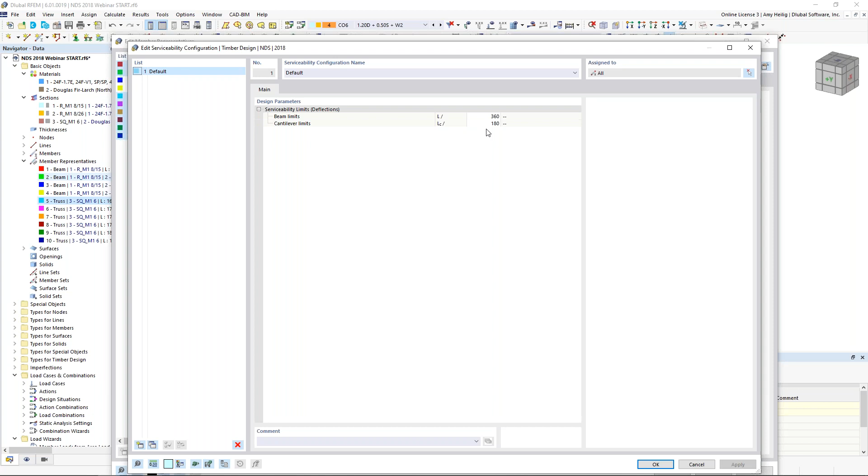Fire resistance design, we won't be doing that today, but that is a possibility to also calculate according to the NDS standard. I'll just go ahead and clear out this setting for now, that's fine. The design supports and deflection. So by default, the program is automatically going to consider every member as simply supported. So it's going to refer back to that L/360 design ratio.

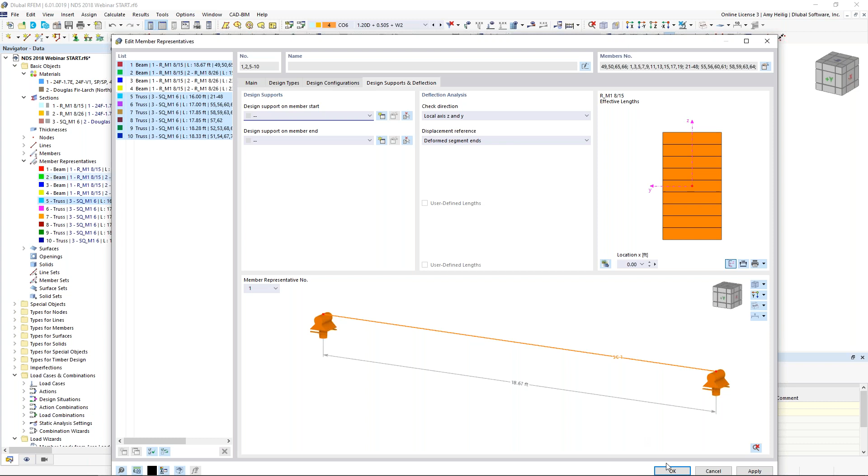Now, if you have a cantilever, you will need to define a design support, the member start or member end. I am actually going to breeze through this tab here because our second quick example at the end of the presentation today will go much more into detail for this. So for now, we just want to keep everything as default. Okay, so once all of these settings have been defined, we are now ready to run our analysis, but also the design of the structure.

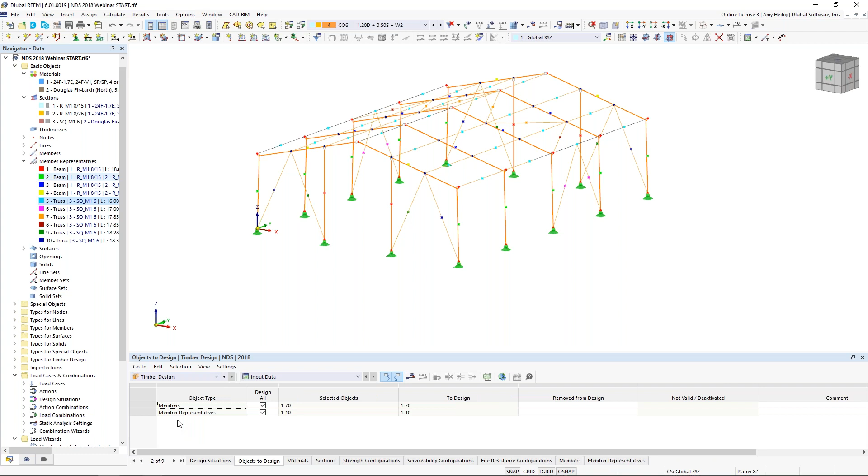So what we'll do is to utilize our table options down here to drop down to timber design. So this is active because remember at the very beginning of the presentation, I've enabled that timber design add-on. And if I take a look at my table settings here and this first tab, design situations, I have my 3 design situations that were generated automatically from the program. We've already reviewed these, my LRFD, ASD, and then I have my serviceability from the IBC. Well, I'm not doing ASD design today, so I'll just simply uncheck that.

Now notice my factored load combinations or my LRFD design situations should be associated here with my strength limit state design. So I can make sure that that is selected appropriately from my drop-down box here. I'm not doing ASD design, so we'll skip over that. And finally, my third design situation here for serviceability should be set according to the serviceability limit state design. Now the program knows which load combinations to refer to for my actual design portion of the calculation.

Now, if we wanted to run fire design, perhaps we go back into that load cases and combinations. We make a copy here of maybe our LRFD design situation, and we can select fire design from our drop-down box here. Under the objects to design, we see members 1 through 70 are automatically selected. All of our member representatives are already selected here. Everything was defined for our design input for each one of those members, so we should be able to design all of them as well.

I'm now ready to run my calculation, which I can do so directly within this table. So I begin the calculation and the program must inevitably run through all of my various load combinations in order to determine the internal forces, the stresses. You can see that these solve pretty quick now in RFEM 6, and we're now running the timber design add-on according to the NDS standard, and here we are presented with our results.

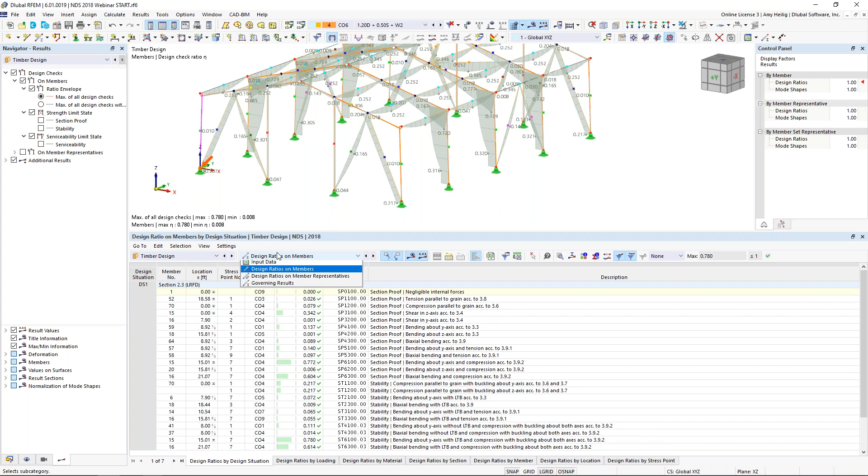So I'm now looking still within the table format for my timber design here, but now I have available the design ratios such as for the member representatives. Well, down at the bottom, I can select the design ratios by member representatives here.

And as you can see, the program is synced up with the graphical view so that we're showing you every check within the NDS. For this group of member representatives, the program will point you to exactly where the controlling internal force or stress is located.

If we're interested in filtering to only the max design ratio, we can take advantage of the filter options up here at the top. So perhaps we want to choose the option max, and now maybe we're not so overwhelmed, and we can just see what's exactly controlling for each member representative.

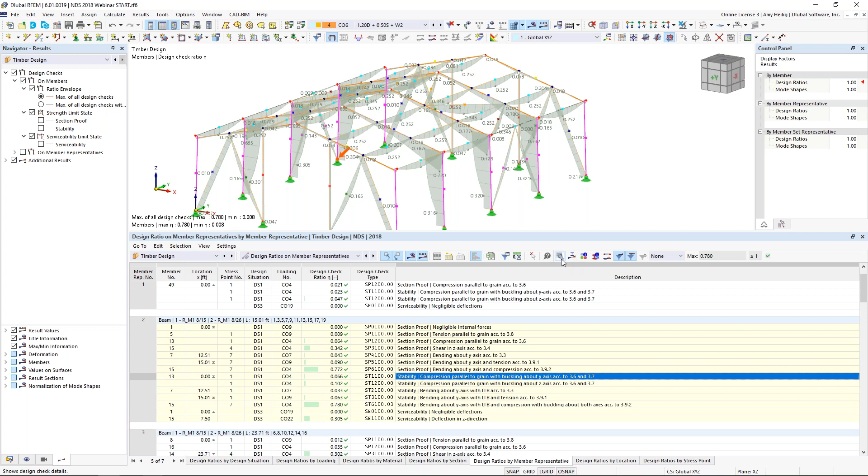So going back to the details here within our design, I want to take a look at one of these checks. So we can see the member that we're currently looking at, one of these columns, and stability for compression parallel to the grain. Well, we've added within RFEM 6 the ability to check out the design check details.

And I think this is incredibly powerful because now we are showing you all variables. We are going to show you all of the equations here and also the code references directly to the NDS standard. All this comes into play to determine eventually what is our design ratio here at the bottom. So incredibly transparent, we can understand where all of those numbers are coming from. We can add this information to our printout report.

We can use our drop-down box over here to maybe move to a different section proof here to view the details. But remember, we talked about in the PowerPoint the representative section dimension for those tapered members. So here are our results now for that new check. We can see the representative depth for the tapered column is now calculated.

When I click here, the program automatically highlights which equation is being used, and we can come up with that new depth that will be used for the calculations in stability. So just wanted to point that out. That was exactly what we just reviewed within the PowerPoint.

Okay, so now that we have reviewed all of the timber design, of course, there's much more to look at, but for the sake of time, we'll just give you a brief overview for today. Now, I want to back this up a step. So let's take a look at only one of our frame elements here, and maybe we choose the visibility by the selected object. So we don't necessarily have to view the entire structure at once.

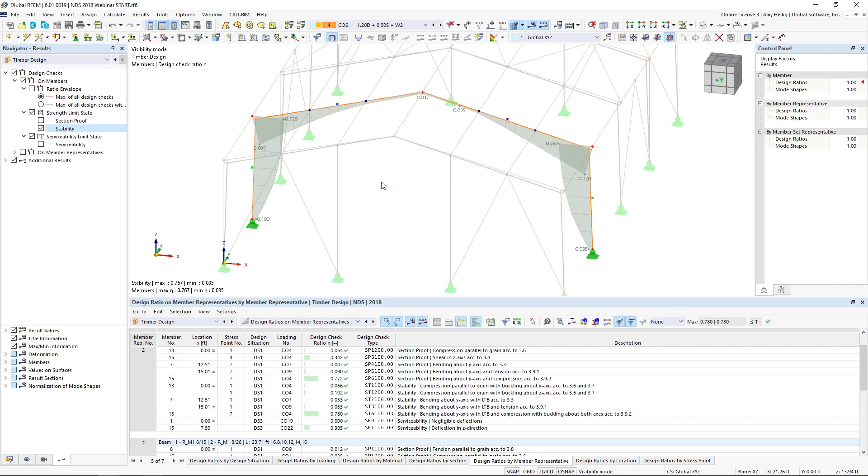But in addition to the timber design, we also have this drop-down box for the static analysis. So the static analysis was required to determine those internal forces, the stresses, deflections, and so on. Notice my table automatically syncs up here to drop me to the static analysis, and my results can be viewed in table format. So for example, I'm currently looking at the deformation, but maybe I'm interested in the internal forces of the members. So I can see my axial forces here, my shear forces, maybe my bending moments.

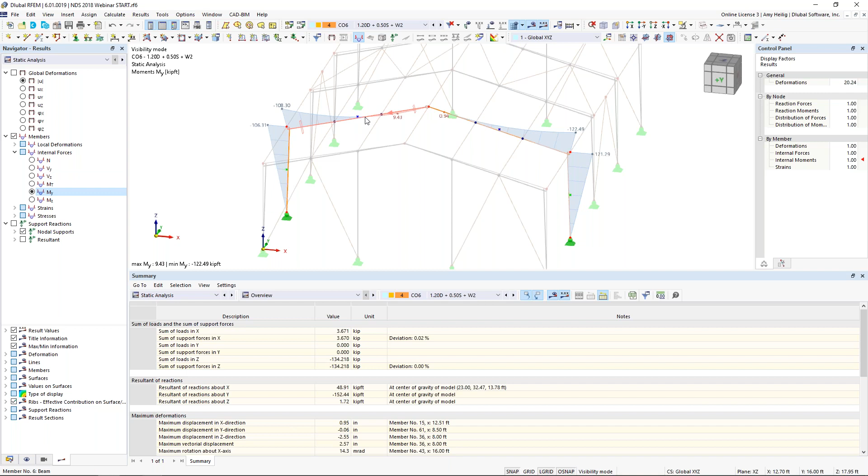And for any one of these members, I can right click, and under the members option, I can take a look at my results diagram. The results diagram allows me to turn on and off these various internal forces, deformations. I can view in a bit more detail what's going on along the member length. I can toggle to different load combinations here. I can add this to my printout report. I also can drag this over to my second monitor and continue working concurrently within the program.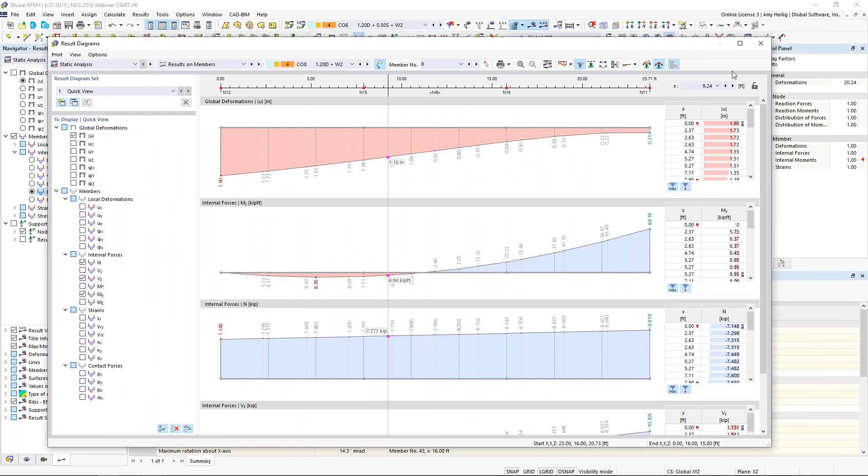So I think it's important to know, again, that both the static analysis and design workflow is working together within RFEM 6, and both of those results are available to us. Okay, so that will summarize essentially timber member design for the most part of this entire structure, but I did want to talk about one more new feature, and I think that this is best described with a new model, just so we can simplify a little bit here.

So I'll open up this already saved model, and we can see that we have multiple members drawn here. And we have our main girder element spanning in the global y-axis direction. Then I have these additional joist members, and these joists are actually going to be supported by the girder member. So they're technically going to be placed at the top of this member.

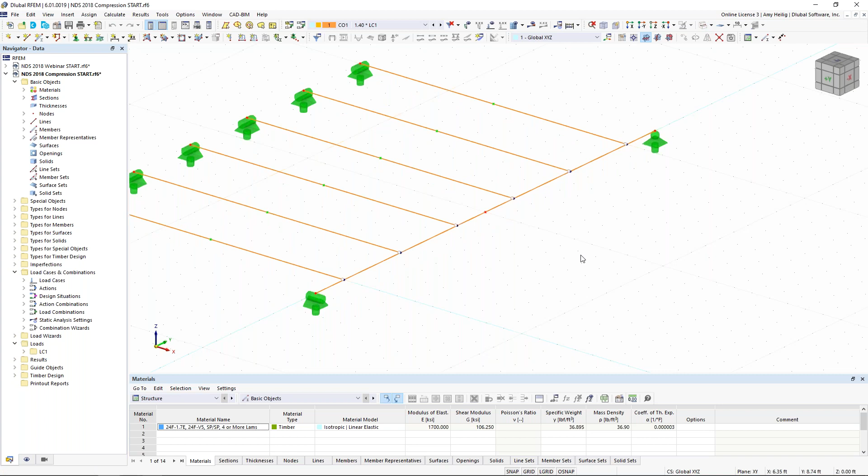When we turn this into wireframe view, we know that with any FEA program, these members are just represented by a single center line. Of course, we can render it just to get a better feel of what dimensions are being used, how these members frame in together. But underneath the hood, this is what's going on.

So if my joists are sitting on top of this girder, sure, I could add in an eccentricity to move these joists up to the top, but sometimes this causes unwanted moments at our member end. So for today's example, we're just going to leave this exactly as it's shown, but just visually know that we want these joists to be framing in at the top of this girder supported by it.

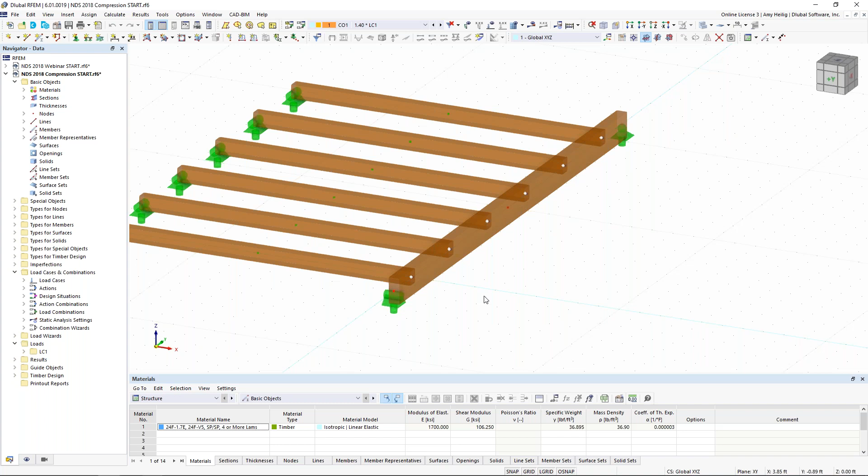So what is the entire purpose of this example? Well, now we want to turn to a topic that again is new within RFEM 6, and it is compression design with stresses perpendicular to the grain. So I'm going to highlight all of my joist elements here, and I can double click. Now, again, we could take advantage of our member representatives in order to set these detail settings. Or for my simple example today, I'll just set each one of them individually, so members 1 through 6.

Now we're going to go back to the design support and deflection tab that I mentioned in the last example I was just quickly going over. So what is the importance of this tab other than just simple deflection? I'll go back to the PowerPoint here so we can talk about compression perpendicular to the grain. And we'll be referring to the NDS 2018 section 3.10.2, bearing perpendicular to the grain.

So what are we talking about exactly here? Well, we can refer to this picture in the lower right-hand corner. We know that the grain is going to be running parallel to the member length here, indicated by this green arrow. Well, this member may be sitting on some type of support, and the support is shown in red, and inevitably we're going to see a support force acting on the member, or this stress perpendicular to the grain.

Now, similarly, in our example today, not only do we have this situation, but we also have the joist sitting on top of the girder with a force acting downward, but it's still a stress perpendicular to the grain. Well, previously in RFEM 5, we did not do this check. And the reason is simple, is that the bearing area was not known. If you remember back to the wireframe view, all that we know are these simple line elements framing in together within the FEA analysis. But now within RFEM 6, we have the ability to do this check because we have the new feature under the design supports.

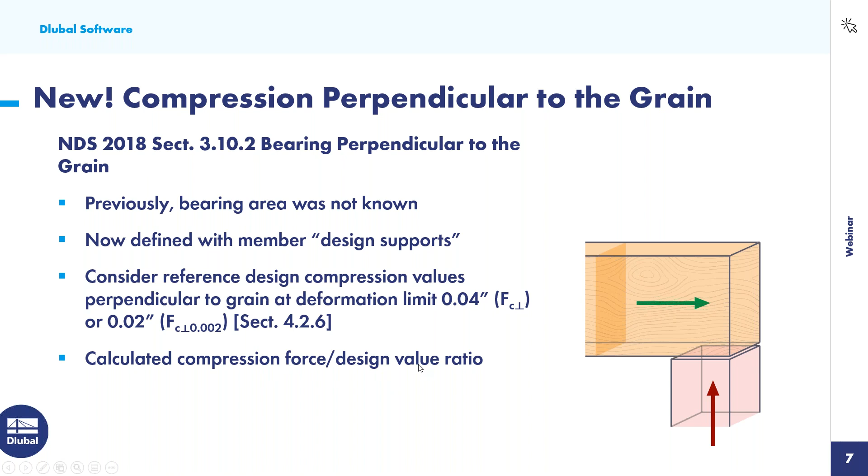So definitely refer to the NDS, which might make a little bit more sense, section 4.2.6 on exactly what these settings are. But ultimately, we are going to give you this check now in the NDS design results, and we will calculate the compression force. Remember, that's that red force here, to the design value ratio that the member can handle.

So let us go back to the RFEM model to discuss this in more detail under the design supports and deflection. So we want to take a look at our member here, and we want to assign a design support for these joists at the member start and the member end because it is resting on this girder. So we'll define a new design support definition here, and I can actually rename it just to make sure I keep all of these straight.

We'll call this one joist 3 inches. It will be a direct support with a support length of 3 inches. It is going to be on the bottom negative z-axis side of the member. Related to the PowerPoint, this is where we need to select that compression design value: 0.04 inch deformation limit or 0.02 inch deformation limit. These supports will be considered in the deflection design.

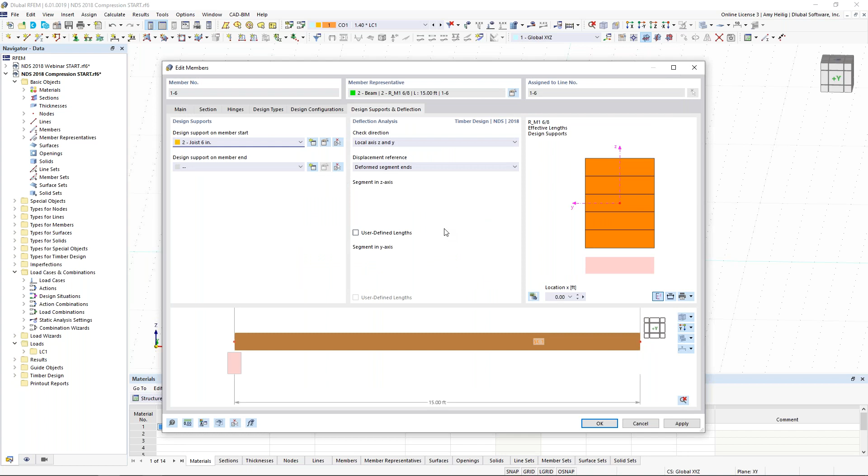I'll go ahead and make a copy of this one, and rename it to joist 6 inches, setting the support length to 6 inches. When I click OK, this allows me to define at my member start that 3-inch support, and we can see this in the background. It will be applicable to these supports over on the left.

For my support on the right-hand side where it's resting on this girder, we want to select the joist 6 inches, and we can see those supports shown here graphically. Notice everything is framing in at the center line.

If we wanted to, under the main tab, we could activate the end modifications and get an additional tab available to us. What is the advantage here? Well, if we wanted to graphically extend the member to the edge of the support, we could do so with a quick click of a button. Now, this does not affect the analysis, the stiffness, or the design whatsoever. It's purely for graphical representation.

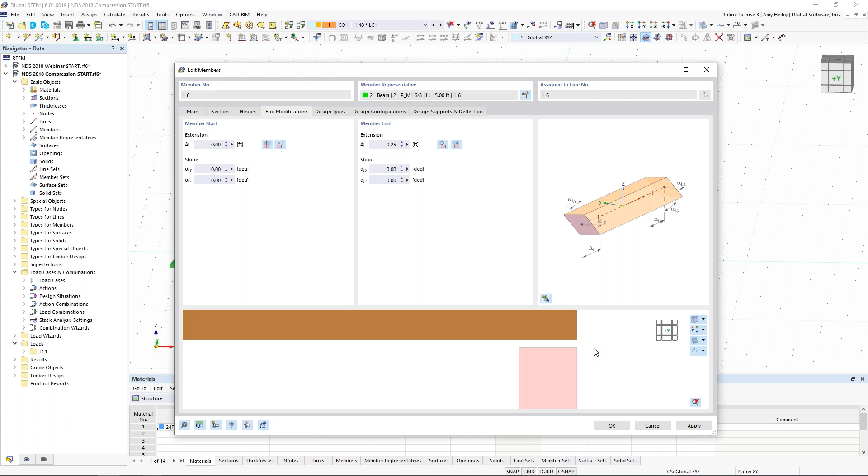So maybe it's important that you add this to your printout report, and you want to show that the member goes all the way to the end of the design support. But just know that internally, we're treating everything with the center lines. Now that we have defined the supports for our joists, we can click OK, and we should graphically see them now at the bottom of our joists here back within the main program.

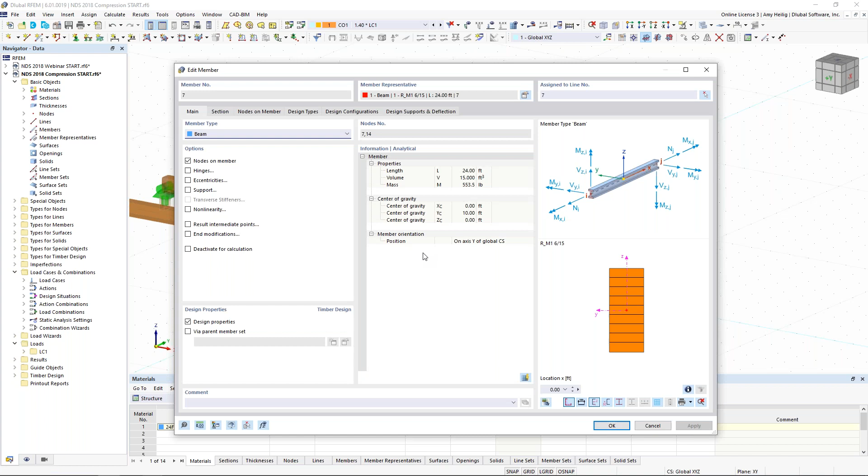Now we want to do the exact same thing for our girder element. I'll jump here to design supports and deflection, and create a new design support definition. This one will be girder, and it will be 5 inches with the support length of 5 inches. This is going to be applied at the member start and the member end.

Now I want to create a copy of this one, and we will call this one girder 6 inches. The difference here: not only the support length set to 6 inches, but we want to set this on the positive z-axis of the member, as well as activate the inner support. This is where the joists are going to be bearing down at the top side of the member instead.

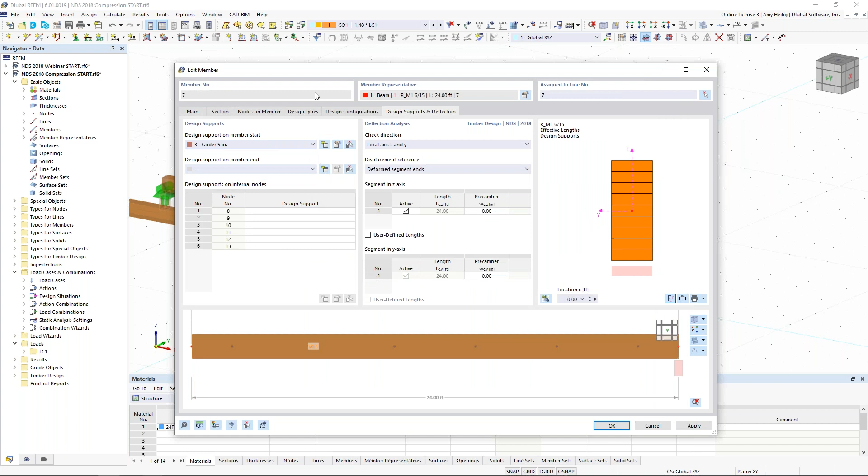So when I click OK, what we can do here is select the girder 5 inches, and this will be applied at the member start and the member end here where we have those nodal supports. Girder 5 inches, girder 5 inches, and then in my interior nodes, which we can see along the member length, we want to select that defined girder 6 inches.

If I hit my down arrow key and F8 on the keyboard, the program will automatically copy the cell before it for each one of those settings. Now we get a better visual representation here of those joists sitting on top of the girder.

But we have one small problem here. Notice that this tab is also used for deflection checks. Now the program is automatically assuming that my deflection should be checked with my L/360 ratio between each 4-foot segment, and that's incorrect. We want the member to refer to the full member length for the deflection design. So how do we fix this?

Well, let's go back into the edit settings here for this last girder 6-inch design support. What I can do is simply uncheck this option down at the bottom to consider the support in the deflection design.

Alternatively, if we're thinking, okay, we do want to consider the support for the deflection design, but I don't want to check compression, what we can do is activate this here and uncheck the direct support instead. So if we don't want to have those compression checks according to the NDS, just go ahead and uncheck the direct support. But in this situation, we just don't want it to be considered for deflection design. Notice our table updates automatically here to the full member length of 24 feet.

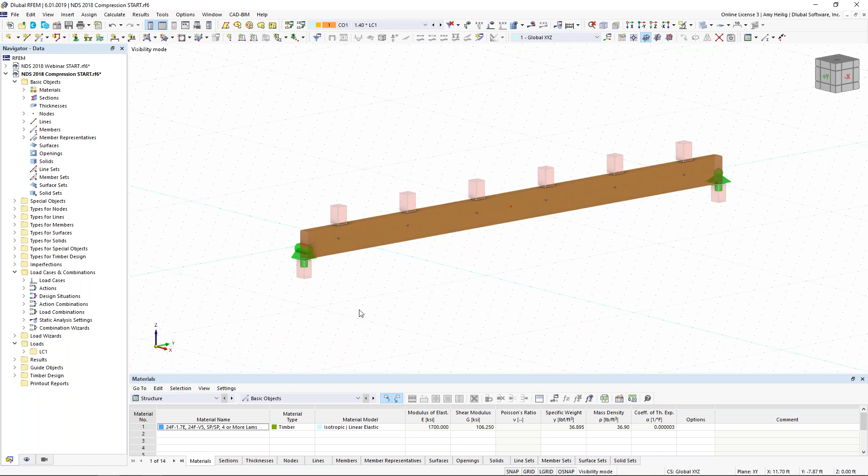I click OK, and now we can see these design supports shown along the girder. If I want, I can select this element and view the visibility by selected objects, right-click to hide the objects in the background. This gives us a better representation visually of those joists sitting along the member, as well as our supports.

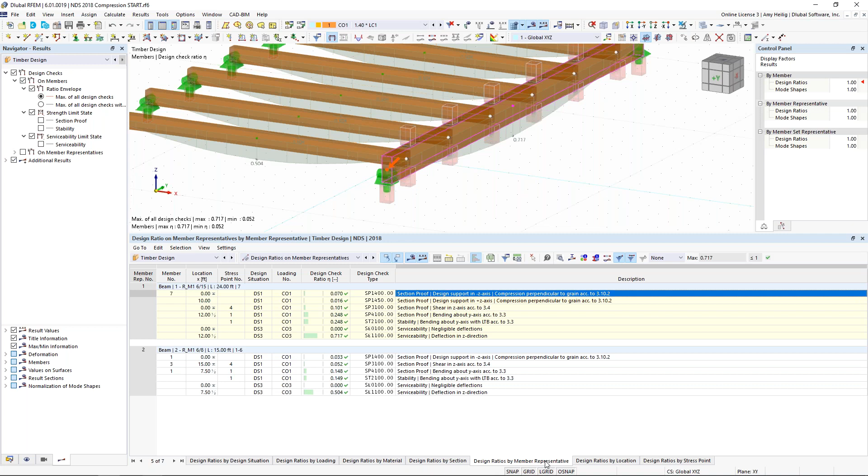Now that we've defined these design supports, let's run the calculation in the timber design. I want to point out what the design calculation details look like for this new check within RFEM 6. I'm looking at design ratios by member representatives, down at the bottom tab. Currently we're looking at the compression perpendicular to the grain according to 3.10.2. This is that new check.

Before we look at the details of this particular check, let's back up a step to the static analysis. This shows my support reaction for the static analysis at this particular location, and we can see that is 2.35 kips.

If I toggle back to my timber design and take a look at my compression perpendicular to the grain at this location, and go into my design check details, sure enough the compression force perpendicular to the grain that the member must resist is that 2.35 kips for my support reaction.

Looking at the additional details here, we can see the bearing length of the design support is set at 5 inches. If you remember, I had manually input that with the design support. The program multiplies that by the member width, the 6 inches, to get the bearing area of 0.21 square feet. So now we can run this calculation check for the compression perpendicular to the grain to get our design ratio of 0.07. This is new within RFEM 6, and it's only available when you define those design supports.

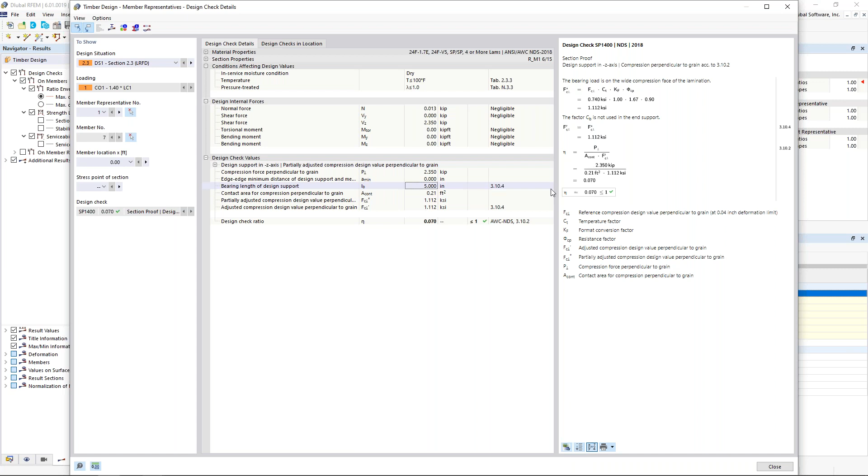If we look a little further down the member, we're also going to see compression perpendicular to grain, but this time for the positive z-axis. This is those joists framing down at the top of the member. So we'll check that similar check, but rather at the internal point of the member.

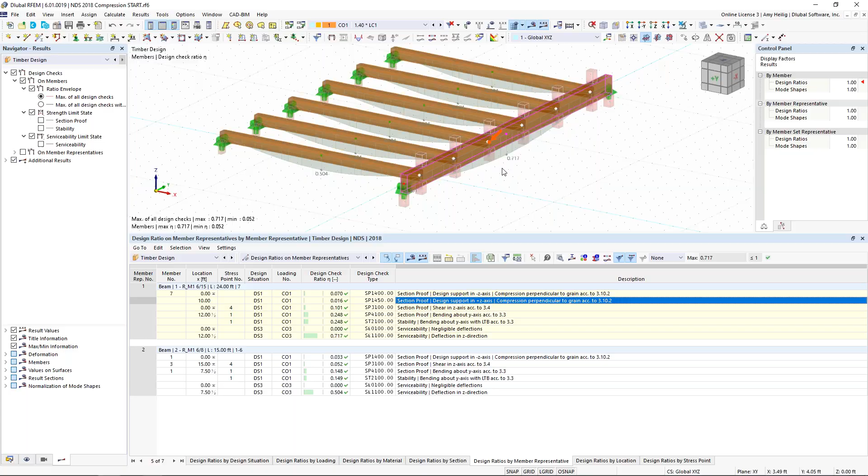All right, so that will wrap up our examples today, and we'll go ahead and conclude today's webinar.